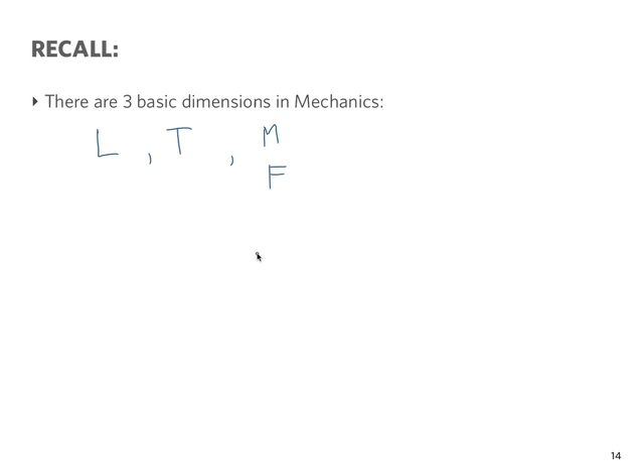In thermodynamics, we introduce another one, which is the temperature. And in thermodynamics, then we have sometimes to deal with a little bit of thermodynamics for fluid mechanics as well. The SI units are meter, second, and kilogram.

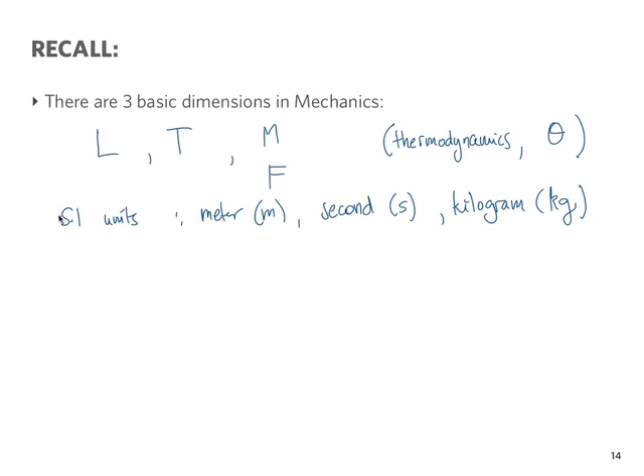And then there are what we call the derived units. And these derived units are, for example, force. Well, what is force? Force is equal to mass times acceleration. So we can derive, as the title says, those units. And force, mass times acceleration, so 1 kilogram of mass going at an acceleration of 1 meter per second squared is what we call a unit of force, which is the Newton.

Another very important quantity for mechanical engineers is work. Work is force multiplied by a distance, and so in SI units it'll be 1 Newton multiplied by 1 meter, and that is equal to the unit of work, which is the joule. 1 joule is equal to 1 Newton meter.

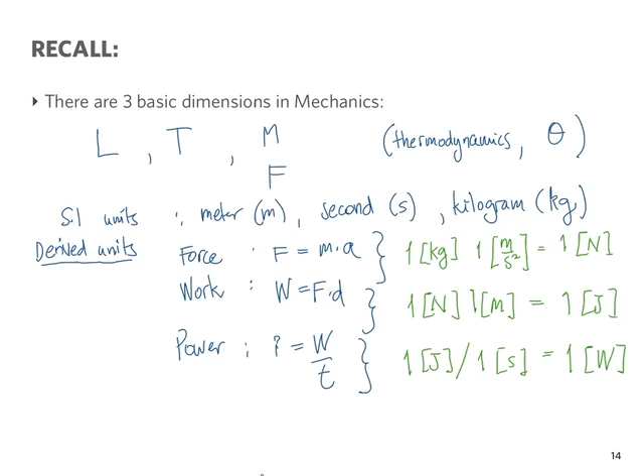Okay, so the next thing we need to do is recall the measures of mass and weight. And just to be on the same page for this course, we define the density, you know, but let's just make sure that we have this: mass per unit volume. The dimensions then are going to be mass divided by length cubed, and SI units are therefore kilogram divided by meter cubed.

And in terms of fluid mechanics, an important insight to have is how density changes with temperature or pressure. And the density of liquids changes very little, in fact, with temperature and pressure. For example, some example values that we can cite, and values that you need to sort of get used to by doing several exercises. Some of the numbers you should be able to inspect and sort of have a feel for.

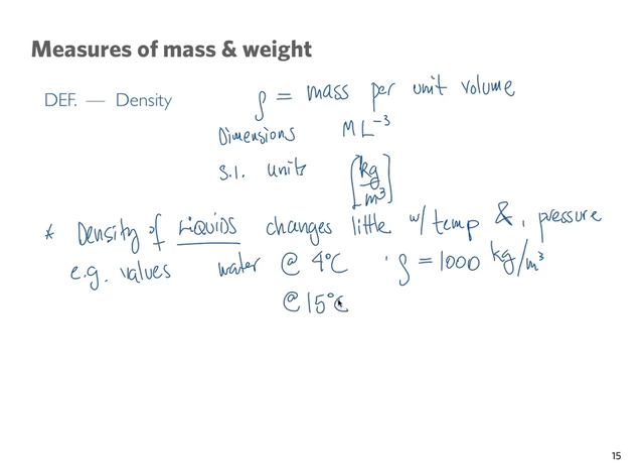That is water at, say, 4 degrees Celsius. The density does change a little bit, but not much, is 1,000 kilograms per cubic meter. If you look at water at 15 degrees Celsius, then, as I said, it changes very little, and it is actually 999 kilograms per cubic meter.

Gasoline at 15 degrees Celsius. What do you think it is, gasoline? Is it lighter or heavier than water? It's lighter. It floats. If you have a layer of gasoline on a puddle, it'll float, right? How much? More or less, you have an idea? The density? How much more, how much less than water, do you think?

Take a guess. 3/4. That's a very good guess. It's about, yeah, it's about that. To be precise, it really is 68%. So that's a very, very good guess. 680 kilograms per cubic meter. Yeah, it had to be less than 1 and more than a half, right? So very good guess. That's a very important thing to develop as engineers.

This kind of thing that you just take the painter's look at something from a distance and you get a feel for the magnitude of things. From certain insight, from doing exercises over and over again, you get that. So when you develop that, if you're making a very terrible mistake in a problem, you will get to the answer and you say, no, that doesn't make sense. It can't be that this thing weighs a ton. It just doesn't make sense, right?

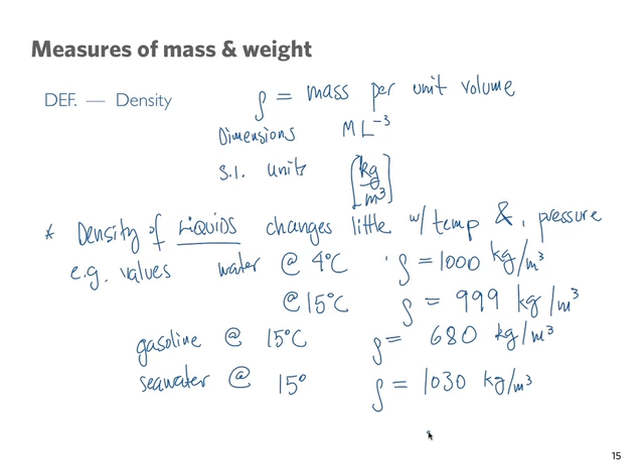So what do you think about seawater compared to just water, normal water? What do you think? Denser, right? It needs to be a little heavier. How much do you think? Very good. It's not very much heavier, but it is actually 1030. So here's a good engineer in the making with some very good sense for dimensions. Okay, that's what we develop over time. Okay.

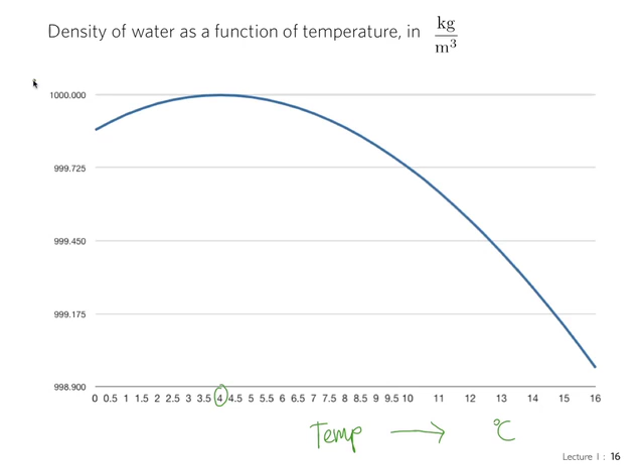Now here's an interesting thing about water. Water is really a very, very quirky fluid. It has this very strange behavior that the maximum density of water happens at about 4 degrees, this is the temperature here in degrees Celsius. My plot here is a little bit sloppy and it doesn't have labels. Very important to put labels in your plots. So here I'm teaching by a counter example. My plot is bad because there are no labels.

And here we have the density. So at least it says density as a function of temperature, so I'm giving you a hint there. And the units, very important. So the maximum density occurs at a temperature of 4 degrees Celsius. Now that's very interesting for water because it means that between freezing and 4, the water gets less and less dense as it goes towards freezing. And so colder water down here is less dense, so it rises. And warmer water in this range is more dense, so it sinks.

And this is a very important thing for the planet Earth because it means that ice floats. And because ice floats, through the ages incredible things have happened and life has been able to survive thanks to this. Because ice will just form this layer on top and the water underneath is not frozen and life can continue despite being in the Arctic or being a glacial age and so on. It's a very important feature of water.

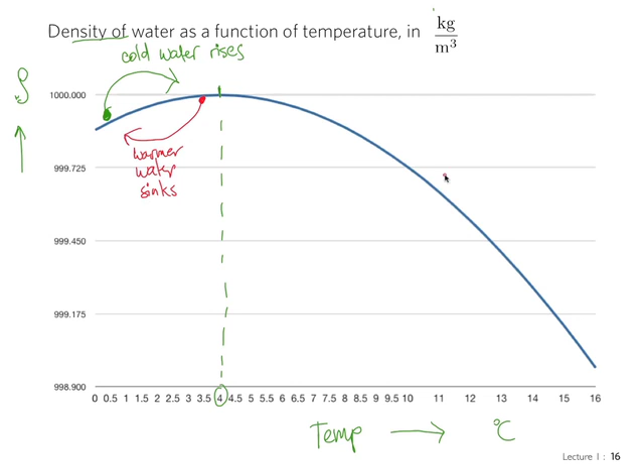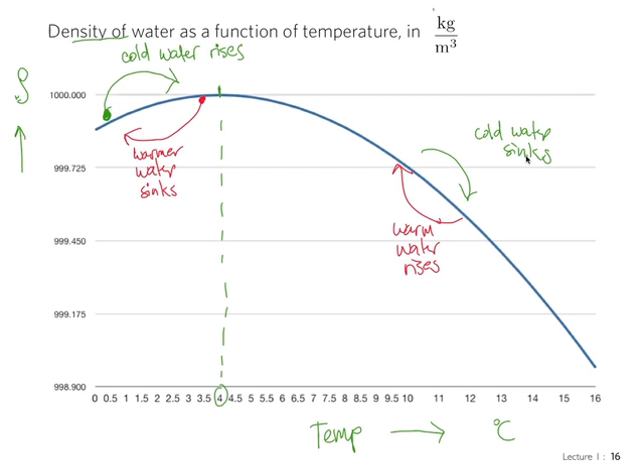And of course on the other side we have the opposite thing. In the other range of temperatures, warm water rises and cold water sinks. That is in the range above 4 degrees Celsius. Okay? Oops, not that one, this one, shift 5.

Okay, so a couple more definitions here just to close this part that we need to introduce and make sure that everybody is clear with. One is specific volume. Specific volume, we use this a lot in thermodynamics as well, is volume per unit mass. And therefore, it is simply 1 over rho, the density. Specific weight, we use the Greek letter gamma, is weight per unit volume. And so mass per unit volume is density, and to get weight, we need to multiply by an acceleration, in this case, the acceleration of gravity.

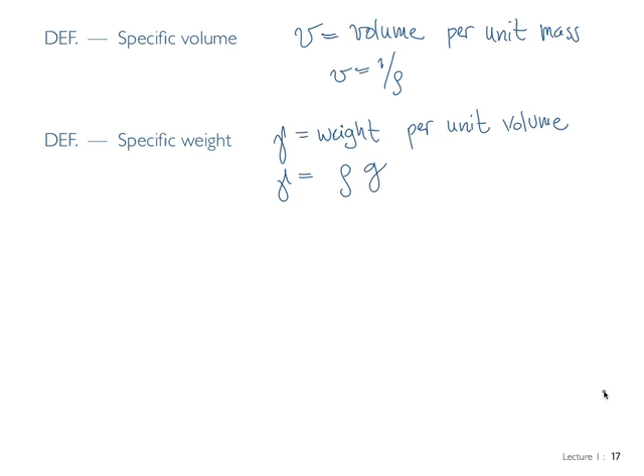So the units, yes? The symbol? Gamma. Is my gamma. So you not only need to understand my handwriting in English, you also need to understand my handwriting in Greek on this graphic tablet. So bear with me. Okay.

Units for specific weight are Newton divided by cubic meters. And for example, let me just see where I have the space for that. Water at standard conditions, 15 degrees Celsius and so on, has a specific weight of 9.8 kilonewton divided by cubic meter.

Specific gravity, we use just the letters SG for that, is the ratio of density of a fluid to the density of water, but at a specified temperature. So for example, we write rho of the fluid, whatever fluid it is, divided by rho of water, usually at 4 degrees Celsius, but this needs to be specified. It will change with temperature.

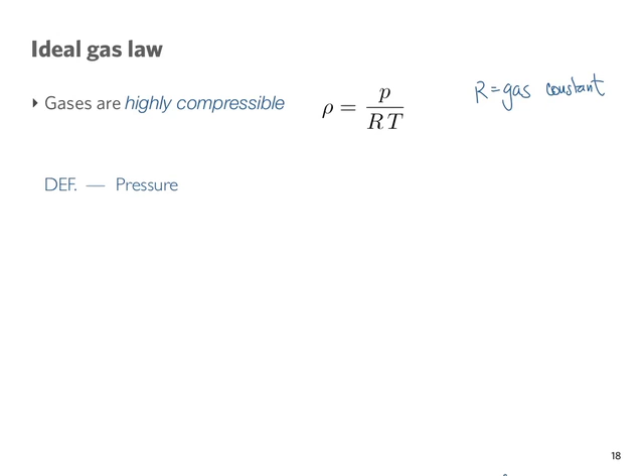Let's define the pressure: it is a normal force per unit area on any plane. The dimensions of pressure are therefore force length to the minus 2. The same as stress, force per unit area. So the SI units for pressure, and the same for stress, are Newton divided by meters squared, which has a name. We call it the Pascal. 1 Newton per square meter is equal to 1 Pascal.

In British units, of course, we use PSI, which is pounds per square inch. And again, those conversion factors, you need to sometimes have them available. As you do exercises for your homework, and additional exercises for your own fun as well, you should accumulate a few, maybe on an index card, of the ones that you use the most, because they will appear over and over. And PSI to Pascal is one that appears very often.

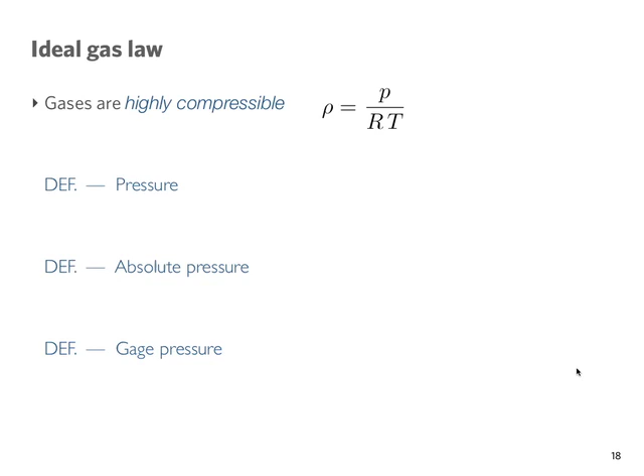Okay? So I'm giving you some tips as we go along, which I'm going to be more precise about now. Today is your first class, so I know you're very concerned about doing well in your courses, and one of the big parts of the assessment is your exam. So some tips about how to do better in exams.

One of the first tips that I can give you is to train yourself to carry all units explicitly through every calculation. Believe me, this is not being pedantic in any way. It really is extremely useful to do this, not only in homework, but throughout your career as engineers. You will learn that you never want to stop doing this. Carry your units explicitly all the way through, meticulously. It is extremely important. I really can't emphasize it enough.

So let's do an example. This is my first example. For these examples that I'm going to do now, I have them written out, so you don't have to write down all of the problem description, because I've copied this over on a nice typed page and made a PDF, and I'm going to put it on Blackboard. Okay, so let me just read it to you. I'll make a diagram as I read it, so that you can take notes of what the problem is, and then you can have that additional PDF for your information.

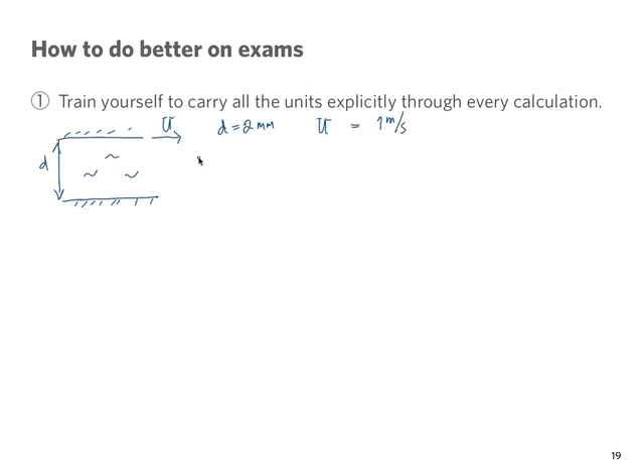And then a shearing stress is measured on the surface of contact with the fluid. So shearing stress, with some sort of device that gives us the force, we measure to be 150 Pascal.

So compared to atmospheric pressure, is that value big or small? Quite much smaller, right? How many times? Like 1,000 times smaller, right? Or a little bit less because it's 150 instead of 100, right? Yeah, it makes sense. We're just measuring the shearing stress due to some sort of friction, so that makes sense. If it was a whole atmosphere, that would be a big number. Okay, so it makes sense. So now the question is, find the viscosity of the fluid.

So, what is the solution to this example? Well, nobody's telling us anything about the fluid, so we're going to assume that it's a Newtonian fluid because they're not telling us that this is anything strange. So we assume the usual linear relationship between the stress and the strain, and so we write tau is equal to mu du/dy.

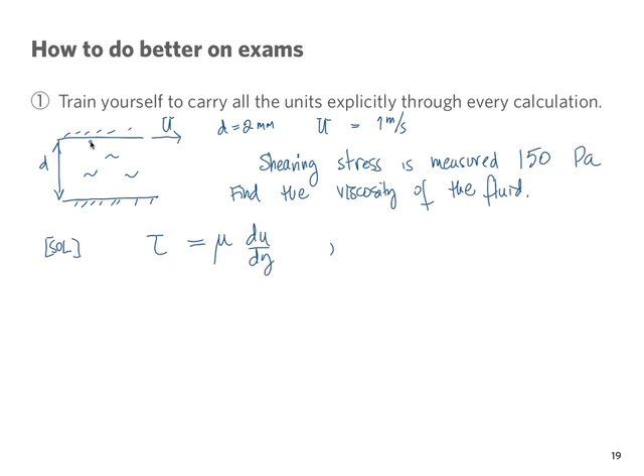And in this case, we have a linear relationship. The velocity of the fluid goes from 0. This is stationary over here. The velocity at the top is u, so it goes from 0 to u. Each layer of fluid then will have a velocity like this that goes from 0 to u. Remember, there's a no-slip condition, so the fluid sticks at the wall. So if the wall at the bottom has 0 velocity, the first layer of fluid has 0 velocity.

The top wall is moving at velocity u, so the layer right next to it is moving at the same velocity, u. So the fluid in between has to adjust from 0 to capital U. So here we have this linear relationship, and therefore we can pretty well estimate the gradient of velocity here, and it's equal to the velocity u divided by, well, I called it d.

Let me just use the b so that I'm consistent. Okay. So now we can very simply solve for the viscosity. And we write tau divided by u over b. So now we can use our data that we were given, but remember to put all of my units in, and I'm going to carry them all the way through.

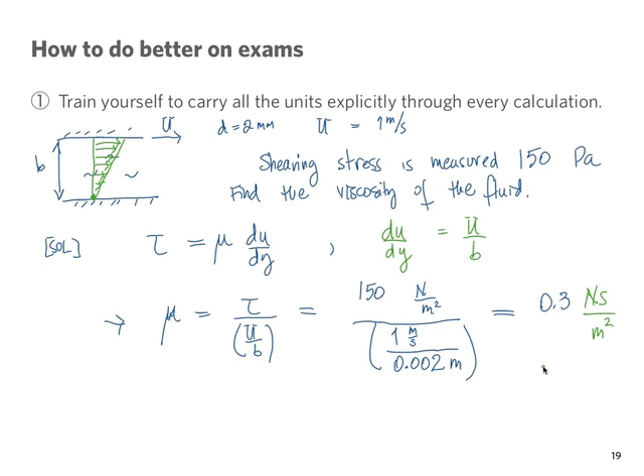Second example. Let's do another example. So this is example 1A. And example 1B is the following. A layer of water flows down an inclined plane, and we are able to observe by some means that there is a parabolic velocity profile.

So it's given, or it's a product of the observation, that u divided by some reference velocity U is equal to 2y divided by h, where h is the height of this layer of fluid, minus y squared divided by h squared. And we're told that our reference velocity is 2 meters per second and h is equal to 0.1 meters. So we have a parabolic velocity profile on a layer of fluid coming down an inclined plate. And the question is to find the magnitude and the direction of the shearing stress.

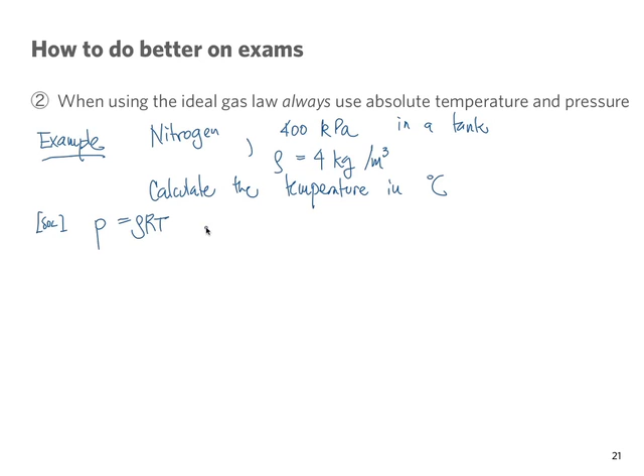So we use our ideal gas law. And so, P is equal to rho RT. So we are asked for the temperature. We solve for the temperature is equal to P divided by rho R. And for the values that we have here, T is equal to 400 kilopascal divided by, we're given density is 4 kilograms divided by cubic meter. Notice I carry all my units, multiplied by R.

I have to look up the value of R in a table, and I'm going to take out the kilo unit here by writing explicitly 10 to the 3. So I no longer have that kilo prefix, and I write my Pascal units in terms that I can simplify them with the other units. So it's Newton divided by square meter. And in the denominator, I still have 4 kilograms divided by cubic meter. And I've obtained from some table the value of R for nitrogen, 296.8 joule divided by kilogram degree Kelvin.

So I put all of that in my calculator and I check my units and I obtain 337 Kelvin. So now I'm asked for the temperature in degrees Celsius, and so the temperature in degrees Celsius is equal to the temperature in Kelvin minus absolute zero, 273.15. I just write 273, and that is equal to 64 degrees Celsius. Always use absolute temperature and pressure in your ideal gas law or any equation of state.

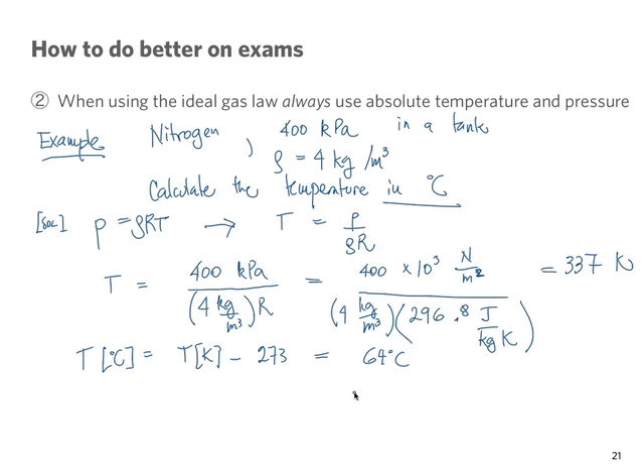And one more example of this. Oh no, another rule, another tip on how to do better exams, and another example to go with it. This other tip is to use the grid method for complicated unit conversions. How is that? So for example, we have this following problem. We're asked to estimate the power required to ride a bicycle

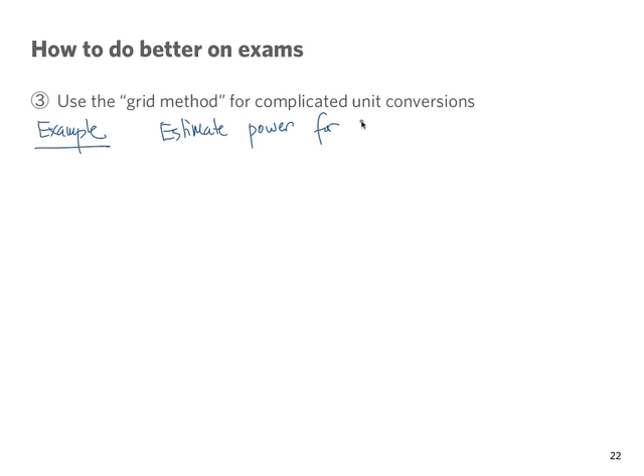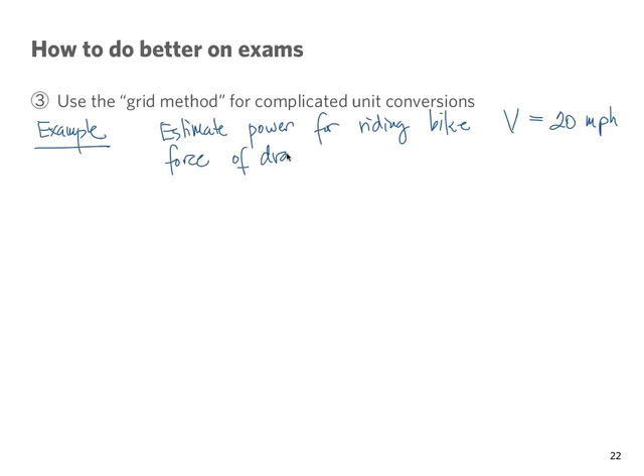if the speed that we're going to ride is equal to 20 miles per hour, and we are told that the required force to move against the wind speed, so the drag force of the wind, is equal to 4 pounds force. But you're asked to estimate the power in SI units. So you want the power in what units should it be? Watts. Very good. So we want to get the units in SI.

So what's power? Power is force times velocity. And so we're going to write with the grid method, because we don't want to make any mistake here. It's a little bit more complicated, and so we go. P is equal to 4 pounds force times 20 miles per hour, and I use now the conversion between miles per hour and meters per second. So write 1 meter per second is equal to 2.237 miles per hour. I have that in my little index cards or material that I have prepared for my exam.

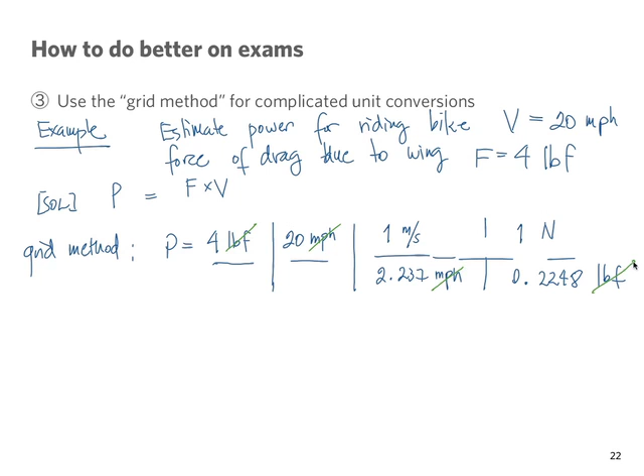Then I want to convert from pounds force to Newton, and so I look at my conversion between Newton and pound force, and I know that 1 Newton is equal to 0.2248 pound force. Now I check that my units cancel like they should, and I see that miles per hour is here, miles per hour is here, it cancels out. Pounds force is here, pounds force is here, it cancels out. I'm left with Newton and meters per second, which is what I want for watt.

And now I'm happy that I can just multiply and divide the numbers that are left here. I have 4 times 20 times 1 divided by 2.237 times 1 divided by 0.2248. I can put all those numbers in the calculator. It's all very nice and tidy, and I obtained my result is 159 Newton meter divided by second, which is the same as 159 watt, which is what we were asked to obtain. Very simple tip that will help you quite a lot to solve problems and not make mistakes. It is truly a way to do better in exams.

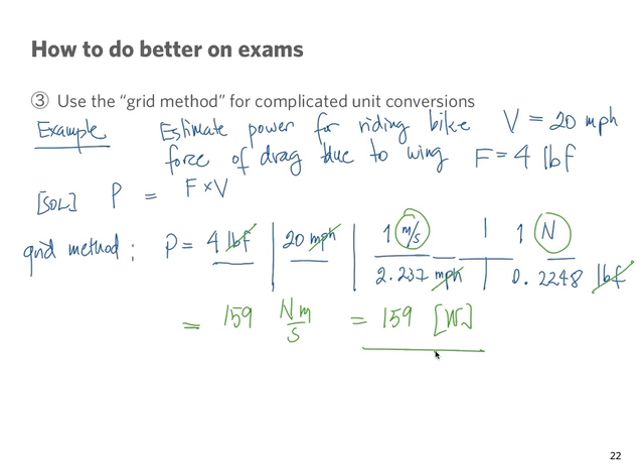And so to finish, first, just to mention the advantage of the international system of units. In the current marketplace, which is the current reality of a global market in a global world, you have to admit that it's a dominant system of measure. In fact, I believe there are only 2 countries that haven't really adopted it as a norm, or 3 maybe. I think it's 2, Liberia and the US, something like that. If there's a third, there's another small country somewhere over there. And so really, the whole world uses this, okay?

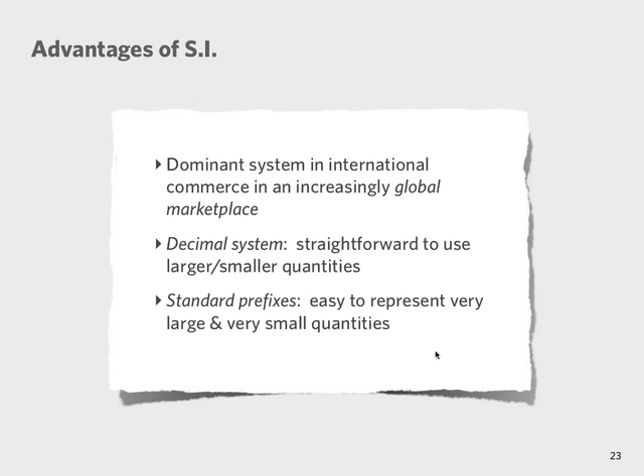It's very straightforward with the SI units to use large or small numbers because of the decimal system, and you have all these prefixes to do micro, nano, then you have kilo and mega and so on. So you can very easily work with large and small numbers because of that, the standard prefixes. So before we go, I'm going to end with a couple of stories today of 2 very large stories of unit mix-ups.

One is the story of the Gimli glider, and I have a link on Blackboard for you to read a story about that. So this is in, I think, 1983 or something, that an Air Canada flight from Montreal took off on the freshly out of the factory, 4-month new Boeing 767, and the pilots realized that they got their information about the situation of the flight of the plane, and the fuel gauges were not functioning.

So when the fuel gauges are not functioning, the captain has the option of making a decision of going or not going. He decided to not cancel the flight, and instead he instructed the ground crew to measure the fuel that they were loading into the fuel tanks with what's called a dipstick. Just a stick that has some gradations, and they measure. And they had 3 different teams independently measure with the sticks the amount of fuel, and everybody was content that they had the amount of fuel that they needed. The plane takes off, and a couple of hours later, there's some light that turns on. There's a problem with the fuel pump. Captain and the co-pilot discuss these things and what is going on.

A problem with the fuel pump. They try to change to the other pump. It seems things are all right. A little while later, another light goes off. The other fuel pump goes off.